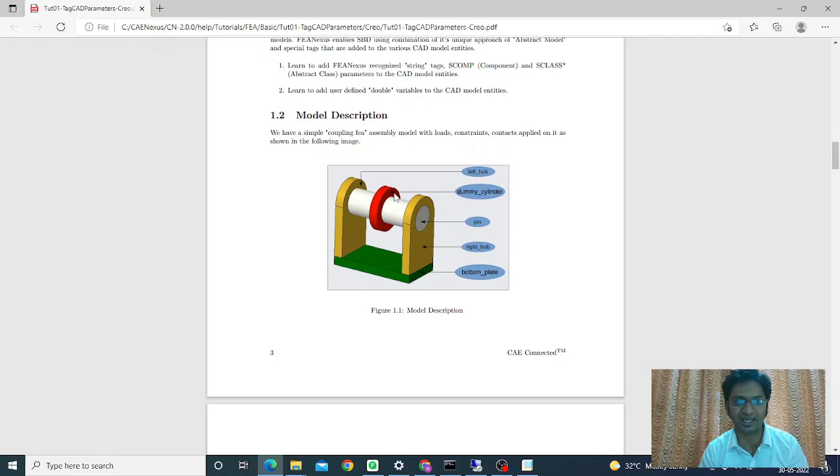Tagging basically means assigning simulation component and simulation classes to CAD parts. Simulation component represents the geometry, whereas simulation classes represent the solver physics recommended by the lead analyst. There are some tables given in this PDF showing CAD parameters, their respective values, and the part on which each needs to be assigned. We'll refer to these tables to add CAD parameters in the coupling FEA assembly.

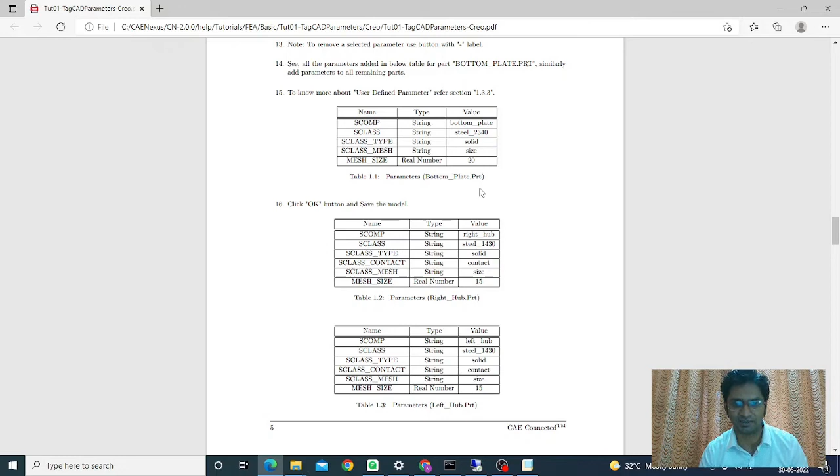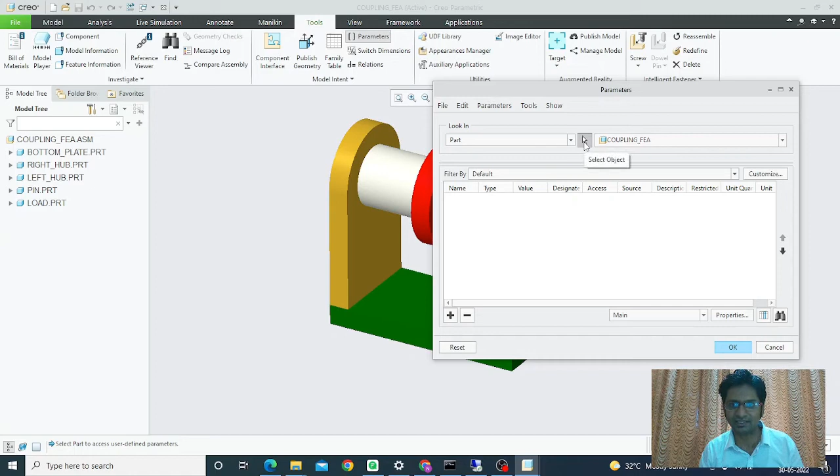I'll select part level here, then click on this arrow. After that I'll select the left hub part in this graphical user interface, then click on this plus sign and type SCOMP, that is simulation component which represents our geometry. I'll set type as string and give value as left hub.

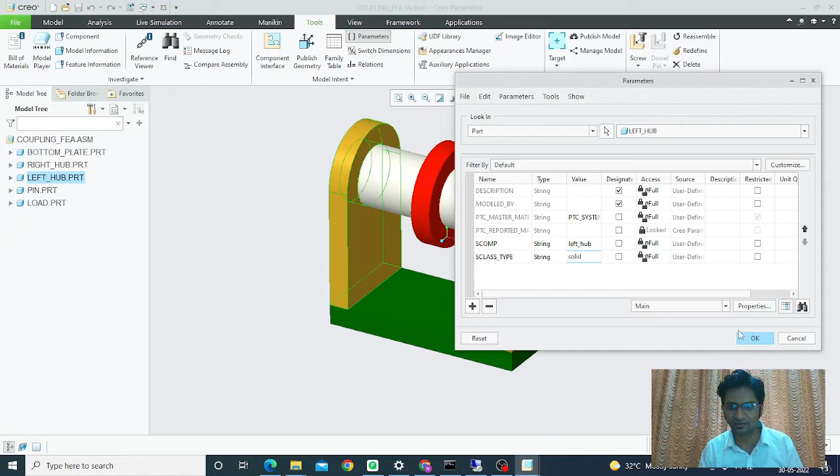Similarly, we'll add simulation class also. S class stands for simulation class and it represents the solver physics recommended by the lead analyst. I'll set type as string here and give value as solid. Likewise, one can keep adding simulation classes based on the physics. Then I'll click OK here.

Now one can see the added CAD parameter in this model tree. For that, one needs to go in settings and add some columns. Just click on tree column, select model parameter, type SCOMP, then click on this arrow. Similarly, I'll add S class type here, click on this arrow, then click apply and OK.

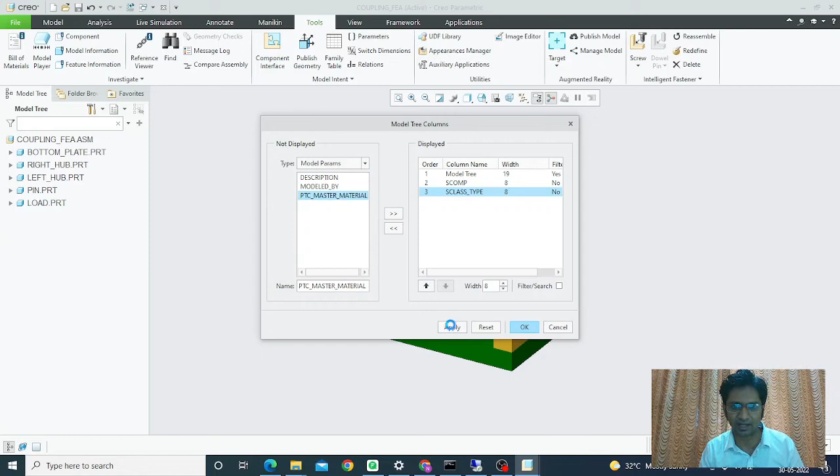So you can see here the added CAD parameters are now getting reflected in the model tree. Now henceforth you can use this model tree to add CAD parameters to other parts.

For example, for this right hub, if I want to add simulation component and simulation classes, I'll directly click here in this model tree. When I click here, it will ask me for the type of value to enter, so I'll write right hub. I'll click OK. Again for S class type, I'll select type as string and write solid.

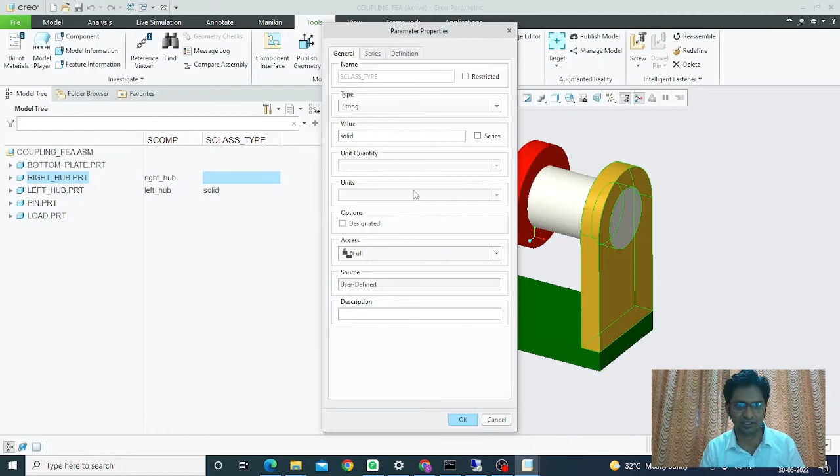So this way one can keep adding CAD parameters through the model tree. You can see here we have added all the CAD parameters on all the parts, again in line with the table given in the PDF.

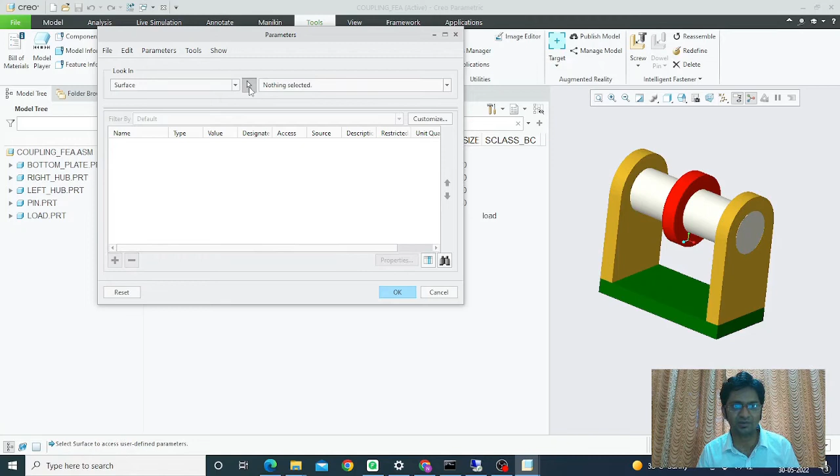Now we'll see how to add CAD parameters at surface level. For that, one needs to go again in the tool parameter, then select surface here instead of part, then click on the arrow and select the surface in the graphical user interface where you want to add the CAD parameters. I'll select this bottom surface.

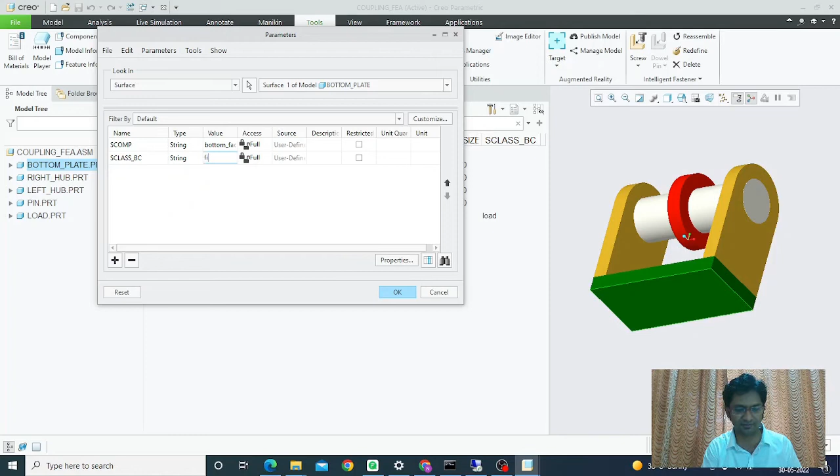Then I'll click on this plus sign. I'll give SCOMP, that is simulation component, with type as string, and give bottom face com. Similarly, I'll add S class BC here because I want to constrain that bottom face. I'll select type as string, give value as fixed, and click OK.

So this way one can add CAD parameters at surface as well as edge level. You can notice that the model tree only shows CAD parameters given at part level; it will not show CAD parameters given at surface or edge level.

Now after adding all the CAD parameters, we need to save the CAD model. Otherwise, all those CAD parameters will not be saved. So make sure that you are saving the CAD model after you are done with the tagging.

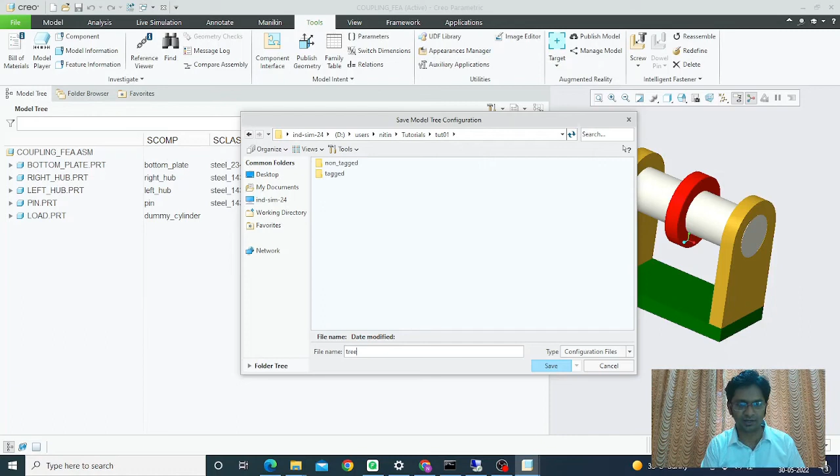Now let's see how one can save this model tree. For that, we need to go here in the settings, click on export setting file, then set type as configuration file, and you can give any file name. I'll give tree.cfg and save the file. So this way we are saving the model tree.

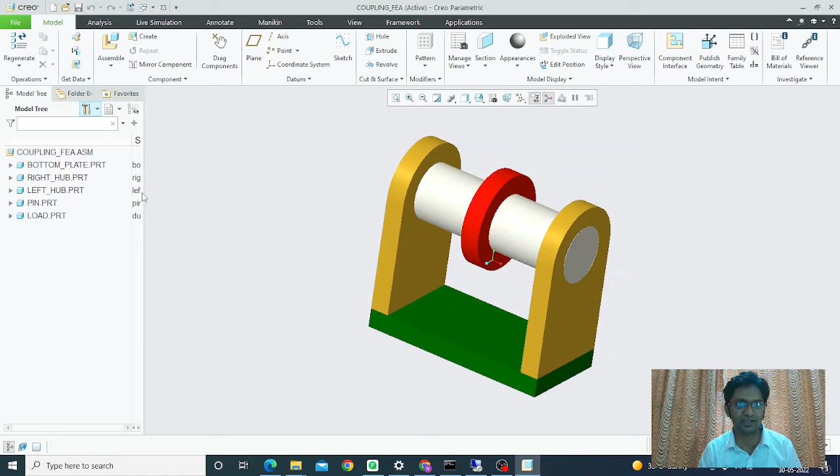Now next time when you open this coupling FEA assembly and if you don't find the model tree here, you can import the earlier saved tree.cfg file. For that, one needs to go again in settings, click on import setting file, set type as configuration file, select that earlier saved tree.cfg file, and click open. This way you can see all the simulation components and simulation classes which were present in that tree.cfg file.

Now one can edit this model tree based on the requirement and again save the tree.cfg file. So that's all from this first tutorial. We have seen how to add CAD parameters onto CAD parts, and please note that unless and until you save the CAD model, those parameters will not get saved.